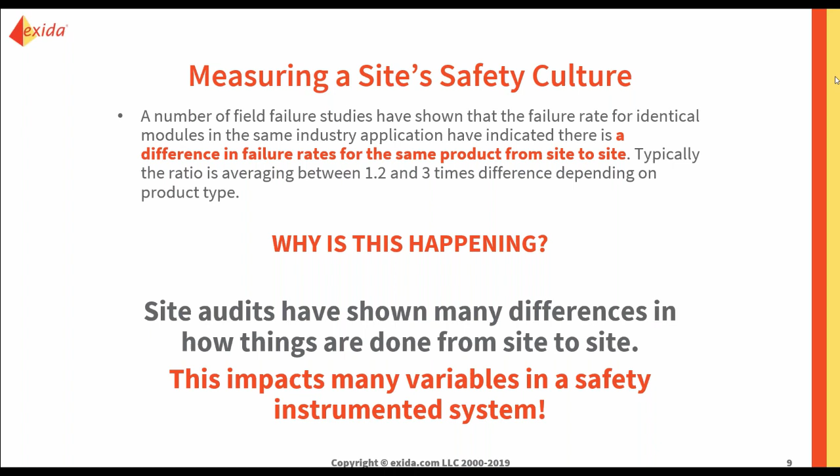And that's what's so critical, is that while company-wide policies and procedures will impact the safety achieved, the possibly different ways company-wide directives are implemented on that site-by-site basis requires that a site index be measured at the site level. And what I'm really trying to say here is that you want to develop that safety culture, right?

Human factors play a part in safety system performance. So what's the point in having certified products and spending all this money to really have a plant that people are just not going to listen to?

Right? You need to make sure that, like I say here, imperfect repair, improper calibration, faulty installation, all of these things are completely separate from spending all this time saying I need a SIL 3 capable system or device so that I can put everything together. But hold on, if you're not using it correctly, if you don't have these personnel in place, personnel competency plays such a larger role than many people realize.

And manufacturers are doing their part here by getting the FMEDAs done, certifying these products so that they can help end users create these systems depending on their risk tolerance levels or the risk reduction factors. But if end user competency isn't there, it means nothing. And another thing that's very interesting is, so people will say, okay, we want you to come on site, take a look, evaluate us, and they'll pick their best site.

So they'll pay people to come in, whether it's us or anyone else, and analyze their site, and say, hey, everything's thumbs up, you look great, continue doing what you're doing, we'll check the box that all your sites are great. Wrong. That's the thing a lot of people are missing. If a great site is what you're evaluating, all your other sites get masked, and all of a sudden they're like, oh yeah, we're great too. But that's not the case. You need to make sure you're evaluating every single site.

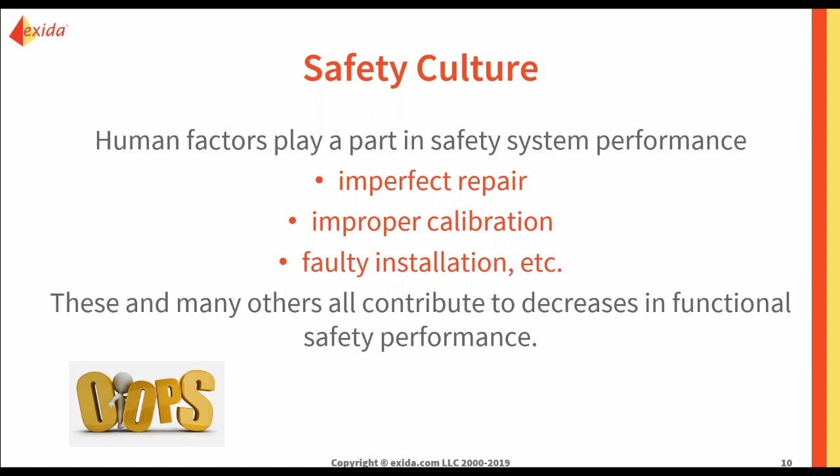If you're someone in the management field, this is something you should pay very close attention to. You could even assign your plant managers on these different sites a challenge: do you have the best site in our company? Here's a checklist, go through it, fill it out, and give it back to me. Actually see which sites are following the regulations, the rules, the policies, the procedures, are they doing their proof testing on time? There's a lot of things they should be looking at.

All right, so that was kind of my intro into everything. Now let's get into some definitions, and I'll give you a couple of examples as to what we're looking for when we're doing these types of evaluations for your site safety index.

Why? Because all of it is computed under the assumptions that human factors play no part in safety system performance. What I mean is, when we're calculating failure rates and doing all these safety metrics, none of them take into account the human condition, the human factor, right? That's what Site Safety Index does. It now puts that into play.

And it does it on a site-by-site basis. This approach allows a site with strong safety processes to actually take credit and get kudos for their accomplishment, that they're doing everything right and not masking issues at other sites.

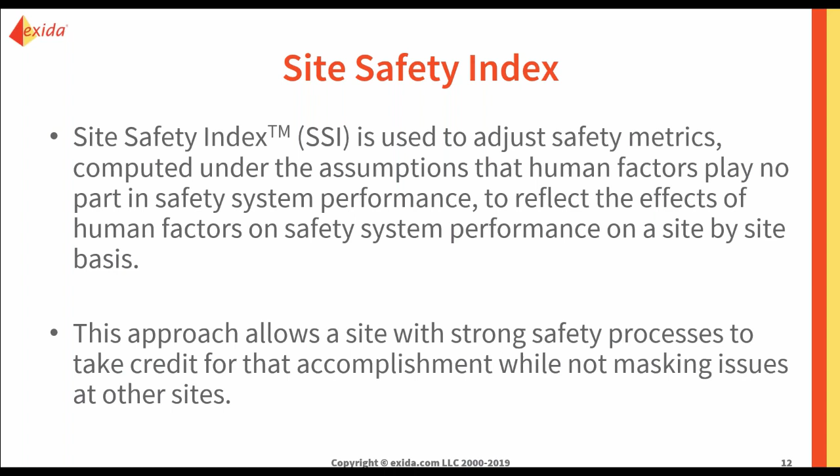So let's say you evaluate a site that's not doing as well as you. All of a sudden, if you don't have evaluations done on all the other sites, everybody's taken to that level, right? And now your failure rates are changing. You might think you're doing better, but now you're not anymore. There's a lot of things that come into play, and we'll explain how certain things within a site really do affect, let's call it your PFD average.

So when you do a site safety index evaluation, there are two different ways. The first way is your external audit. The second way is a questionnaire.

So let's talk about the external audit here. The international standard 61511 lists the requirements that must be met for the entire safety lifecycle process, and you have to meet them all. In an on-site audit, it can be verified that the site meets these requirements in combination with additional detailed requisites for your operation and maintenance activities.

Additionally, all safety and lifecycle procedures are going to be audited to be sure the procedures are adequate to support the requirements and that they are being correctly followed at that site. So the outcome of this audit is we're going to generate a report, and it's going to include your site safety index score as well as any recommendations for changes and improvements. The interpretation of the measured site safety index level will be discussed, and I'll show you the different levels in the upcoming slides.

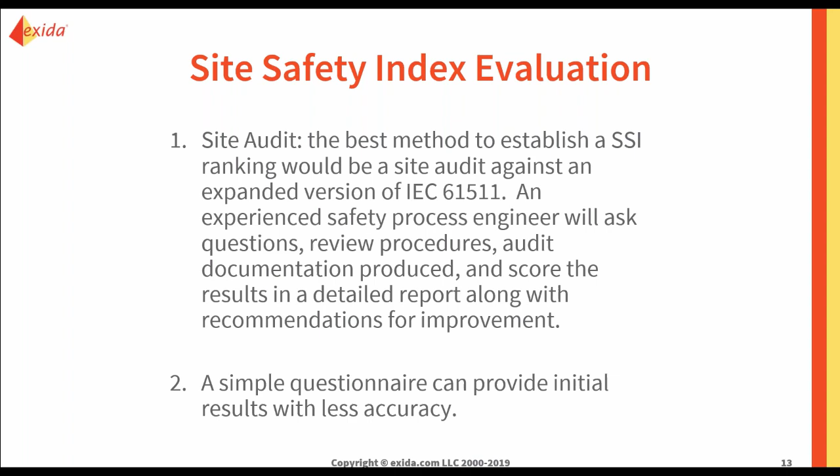Here are some sample questions. These questions here are mainly for the operation and maintenance phase of that life cycle. The complete set of questions can be made available, and how these questions are answered are going to be things like always, often, never, not applicable. Each response is subjected to a weighted scoring system, and that total score you receive determines an approximate SSI level, or site safety index level, for that site.

And so the basis of the validity of using a questionnaire for determining SSI is an acceptable practice. That's per the standard, per IEC 61508. It does allow the use of a questionnaire to determine the beta factor, which describes the extent of the common cause failure to be modeled when you are evaluating the safety performance of redundant SIF architectures.

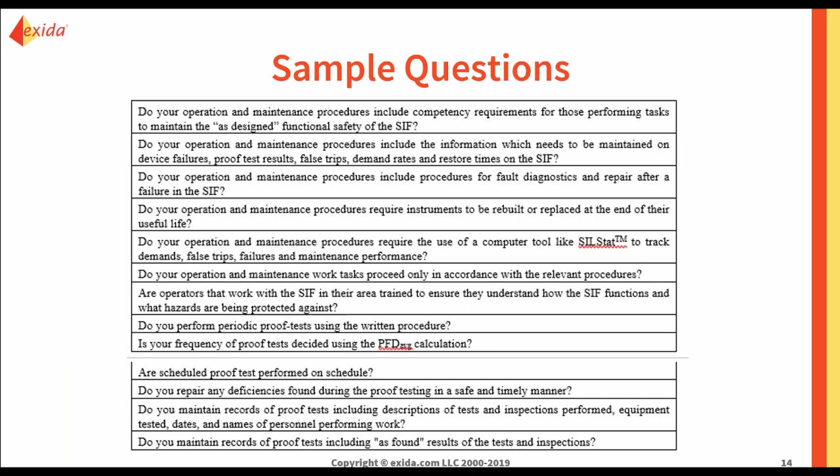And it kind of mirrors the level of SIL, safety integrity level assignment, where SSI 4 implies that you are meeting every single requirement of IEC 61508 and IEC 61511, and you're doing it perfectly. There's no degradation in that safety performance due to any end user activities or practices.

Well, we see a lot of SSI 2. We see a handful of SSI 3. We see a lot of SSI 1. But keep in mind, because I know the questions are going to be asked, no, the answer is no. You don't have to be perfect.

Put in mind, where is your site located? Can you accept a higher risk? Are you in the desert around no one? So if something did happen, is your plant automated so that there's no one working at that plant and it just runs on its own? What is the level of risk? What's the tolerable risk you're willing to accept? And depending on that factor, that's where you can probably take where your SSI level should be.

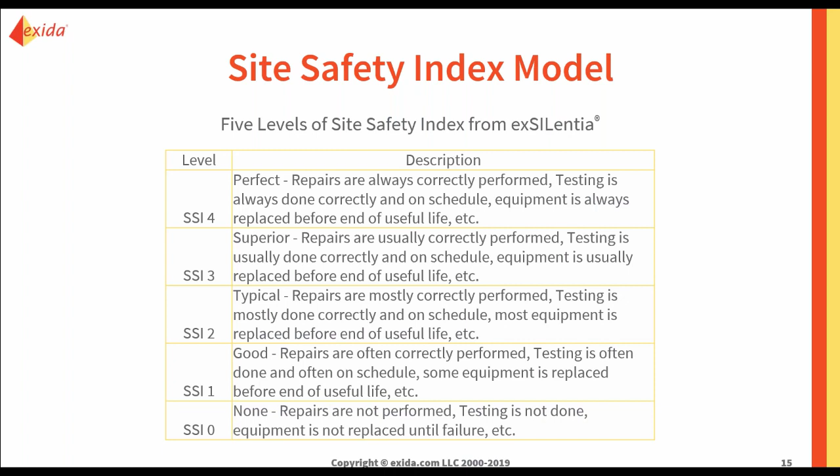All right, let's take a look at how it even impacts a SIL rating. There's specific ways in which the SSI modifies key variables, whether it's device failure rates or proof test effectiveness, and they're all going to impact your PFD average, your SIL, your risk reduction factor, as well as other safety metrics.

I'll explain this in more detail later in the presentation with some additional examples, but now let's look at an SSI of 4 system here. If you look here, you achieve a SIL level of 2, your risk reduction is 113. Everything looks good. You're slightly greater than the requirement for SIL 2 here.

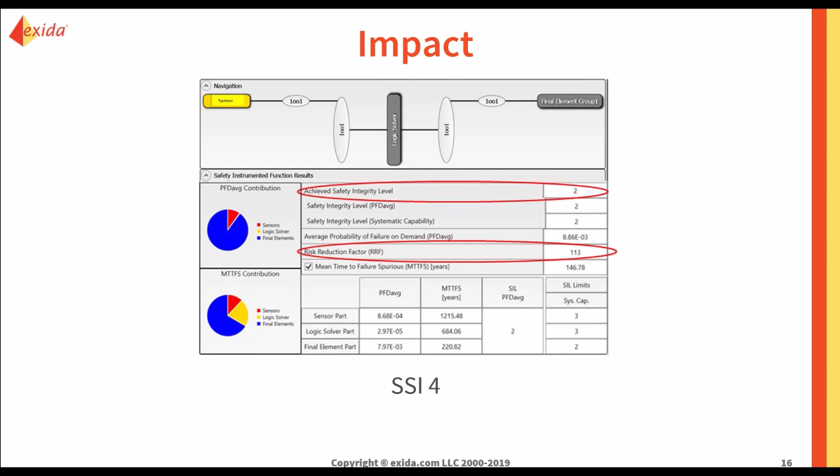If we go to SSI 4, okay, so it's saying everything is perfect, 100%. Everything you do is on time, no issues at all.

Let's say you're great, but you're not perfect. Because you were so close on that risk reduction factor, now you drop down to 98 if you put an SSI of 3. So if you were to just throw in there, and you don't factor in the human element, you don't put this SSI into that site, you might think you're operating at a SIL 2 level in reality, because once you put in the human factor, it drops you.

And so now you only achieved a SIL 1 for this system, this plant, or this location. You think you're doing better than you really are until you put in this Site Safety Index number. It's a very interesting thing to look at.

It's kind of fun to play with. So if anyone has exSILentia, it'd be fun to even take this questionnaire, throw it in there, figure out what your SSI is, and then start playing with your numbers and see how you're truly operating, and see if you're still okay, thumbs up or thumbs down. No one's judging you as long as you're taking a proactive approach to it. Plus, what could you learn from it when you find out the differences?

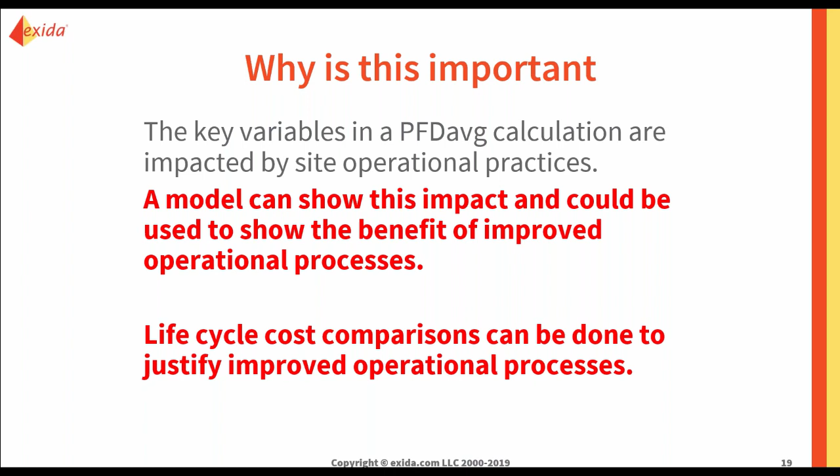So some sites perform better than others. Some sites get more products out the door. Some sites are running with less downtime. So there's a lot of different things now that you can evaluate after you look at your site safety index.

So what are impacted by these site practices? We'll do one example for each. We'll look at failure rates of each product, the actual proof test intervals, the test effectiveness, the mean time to restore, and of course, probability of the initial failure.

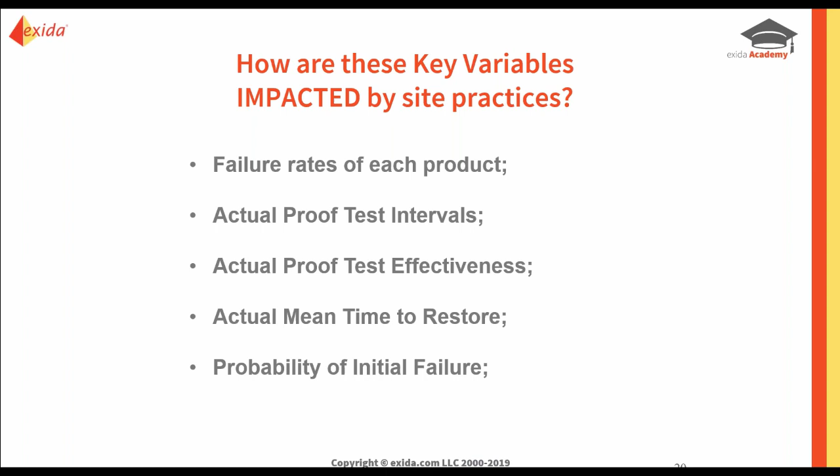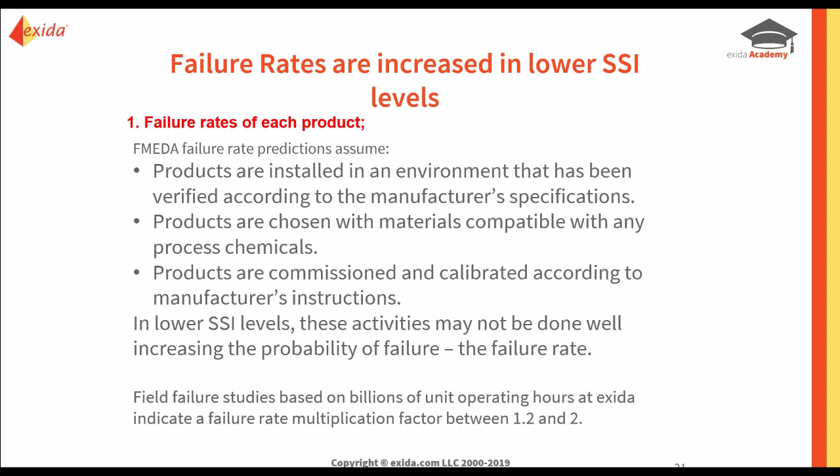So the first one here, failure rates are increased in lower SSI levels. Makes sense, right? Because why? When you do an FMEDA, you assume that all the products are installed in the correct environment, and they're all verified according to the manufacturer specifications. Another thing that's assumed: all products are chosen with materials compatible with any process chemicals. Another thing, products are all commissioned and calibrated according to the manufacturer's instructions. This isn't always necessarily true. So the lower your SSI level, the higher your failure rates become. Makes sense.

So sometimes management can get into these trends of everything needs to be improved. We need to get all this stuff, we need less downtime, and we need to pay the bills. But be careful, because you might be doing more harm if you don't give people enough time to actually do their job. So once again, proof test effectiveness, if that gets hurt, then it's actually going to hurt you when you start achieving a lower SSI level.

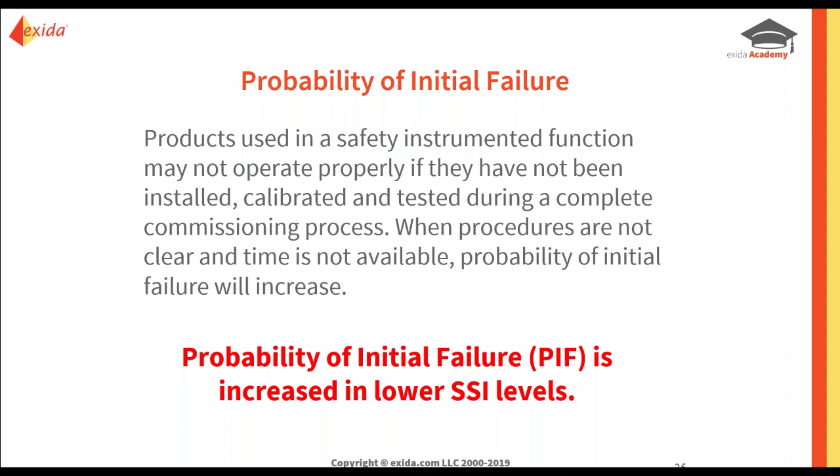And these things make sense, but there are things that you have to think about. So many people just put together certified systems, and they don't think about the people. And if they do think about the people, they're not giving enough respect to those areas.

So really, the Site Safety Index model, as I start concluding here, does provide more realistic PFDavg results. Compared to simply adjusting failure rates, It allows sites with strong safety processes to take credit for it. You can show an impact of different operational policies, and it really does show benefits of improved operational processes. So you can now justify these improvements as well.

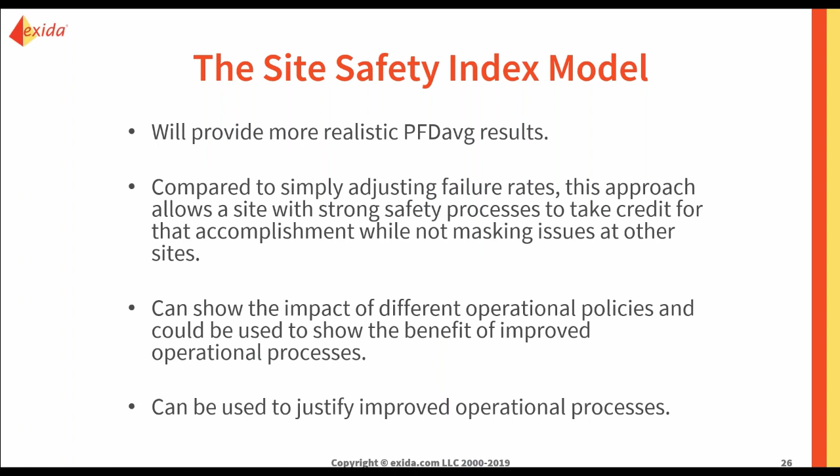What I'd like to do, in the next slide here, is share with everybody the different links to where you can get all this information.

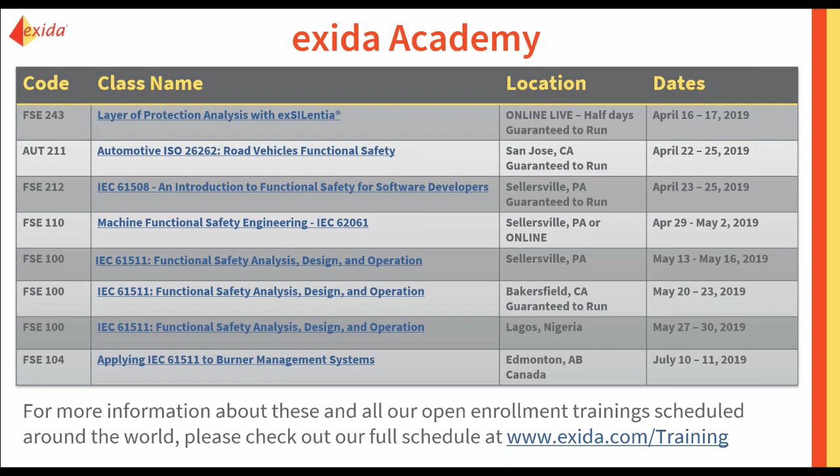As far as competency for personnel, think about it. Who do you have right now that might need some help? Do you need functional safety, machine safety, automotive, burner management? There's courses for everyone, and now there's even courses to do it online. You don't have to go anywhere, because we've realized that a lot of training budgets are getting slashed, and people have to stay at their desk. Well, don't hurt your competency by not being able to travel. Just do it from your office.